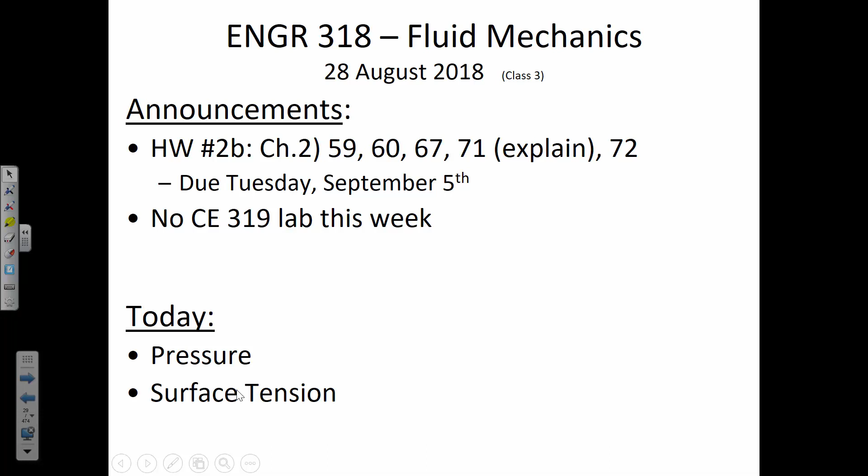All right. For the record, we're not eating shots in the class. It's candy. We're eating candy.

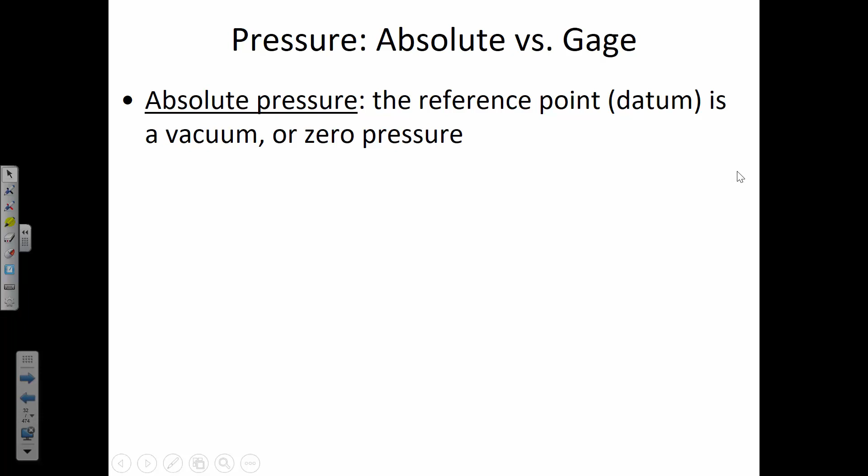So absolute pressure is using a vacuum as 0, whereas like my tires in Huntington, if I was going to measure the pressure, it would be atmospheric plus the actual pressure inside the tire that's over and above atmospheric. So if I keep my tires at, say, 34 psi, the absolute pressure is the relative pressure plus the atmospheric. In terms of kPa, the typical atmospheric pressure in Huntington is probably about 101 kilopascals, and the pressure in my tires above that is 234 kilopascals. So the total absolute pressure in my tires would be 335.

Now gauge pressure uses some other reference point as where we begin our measurements, and atmospheric is our measuring point. So in Huntington, the gauge pressure of the atmosphere is 0. That's measuring how much the atmospheric pressure is relative to itself: 101 kilopascals minus 101 kilopascals. So the gauge pressure of the atmosphere in Huntington is 0. And therefore my tires would just be whatever the differential is that little stick gauge says. This little stick gauge already has built in the assumption that you're starting with atmospheric pressure as your 0 point.

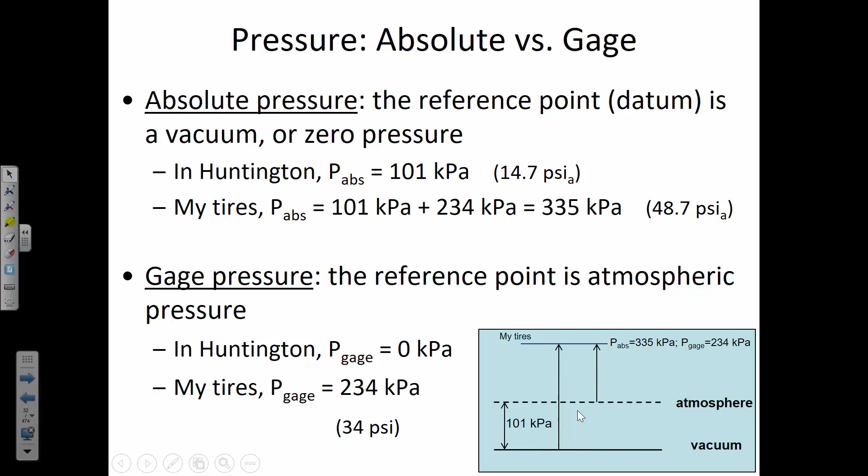Do you remember from our last class on Thursday, when do we usually use absolute temperature? We talked about the difference between relative and absolute in terms of temperature in class on Thursday. It's gases, right - whenever you're working with gases, you'd use absolute temperature. And in the same way, oftentimes when you're doing gas law type problems, you'll also have to use absolute pressures in a lot of cases.

So here is a gas law example. I apologize that we had to rush through gas law example number 1 in class on Thursday. Let's take a little more time for this one though. It uses that same formula, that density is the pressure of the gas divided by R for the gas and the temperature. So here we have a 2.5 cubic meter tank of oxygen.

We're going to pressurize it to 7,650 kilopascals, and that's an absolute pressure. The tank, the steel of the tank, is 50 kilograms, and the temperature of the whole system is 120 degrees Celsius. So what's the total weight, taking into account not only the tank but also the gas?

I think to be more precise, I'm asking what is the mass, not just what is the weight. Let me update that slide to say that.

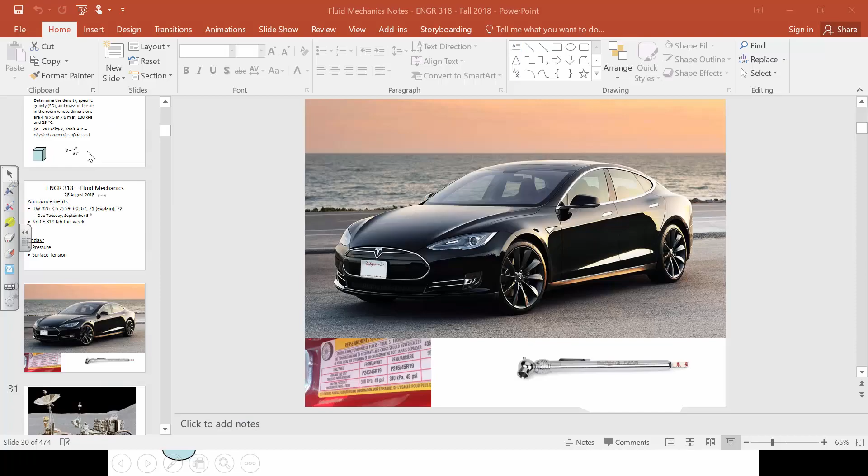What is the total mass? All right, let me pause the recording for a minute, give you some time to calculate based on the volume. You're going to need to know the density of the gas, and then once you have the density and you know the volume, calculate the mass of the gas.

All right, so the pressure is force per area, so newtons per meter squared. My point about units is that if you write 7,650,000 newtons per meter squared, including the units is going to help you see when you do and when you don't need to expand something out to be dimensionally consistent.

So the R value is 259.8 joules per kilogram Kelvin. Now the joules we could expand out ultimately into kilograms, meters, and seconds, but we won't go through that derivation. We just, in this case, know that it's going to cancel out to where the density is going to give us kilograms per cubic meter eventually.

And then the temperature will be 393.16 Kelvin. So when we do that, the density of the gas should be 74.90 kilograms per cubic meter. Did anybody else get that same 74.90 kilograms? Oh, no.

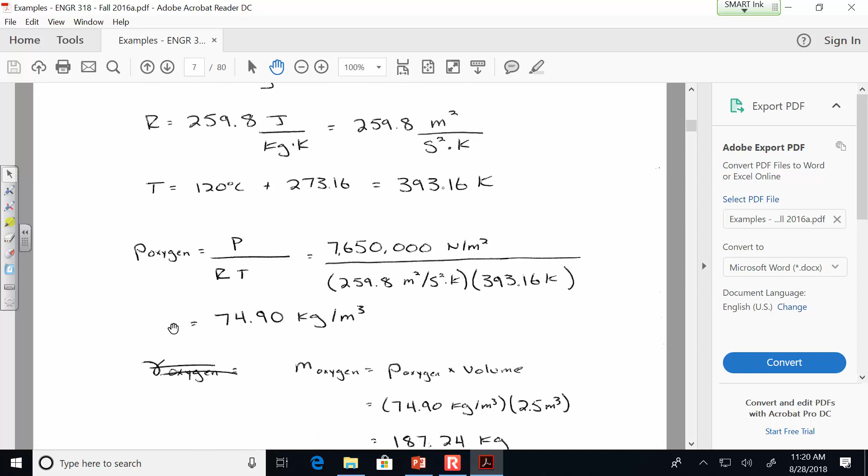That's better. I expanded out the units here just for the curious. A joule per kilogram Kelvin is the same thing as a meter squared per second squared Kelvin. And we see if we put that full expression into the density, when you cancel out the units that are in both the numerator and denominator, cancel out the Kelvin, and of course a Newton is a kilogram meter per second squared, we do get units of density for the density of oxygen, and then the mass of oxygen that's there is going to be the density times the volume.

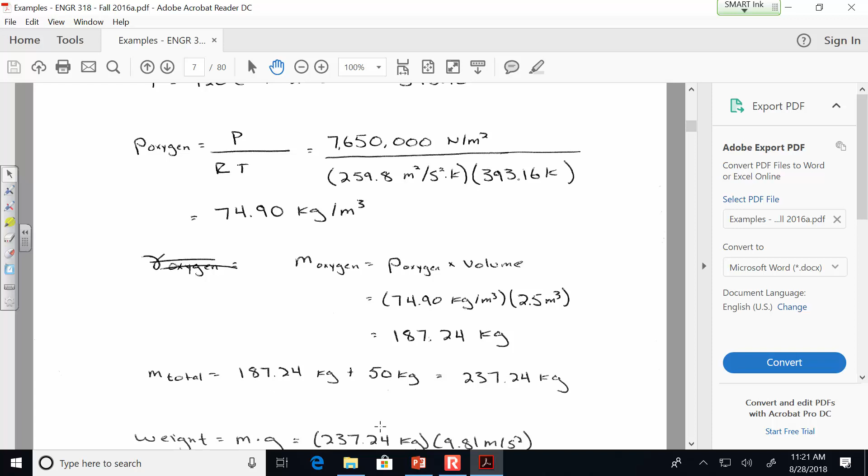So there will be 187.24 kilograms of oxygen inside of that canister, which has a mass of 50 kilograms. That's the mass of the steel of the cylinder. So the overall mass is 237. Oh, it looks like maybe I did want the weight after all.

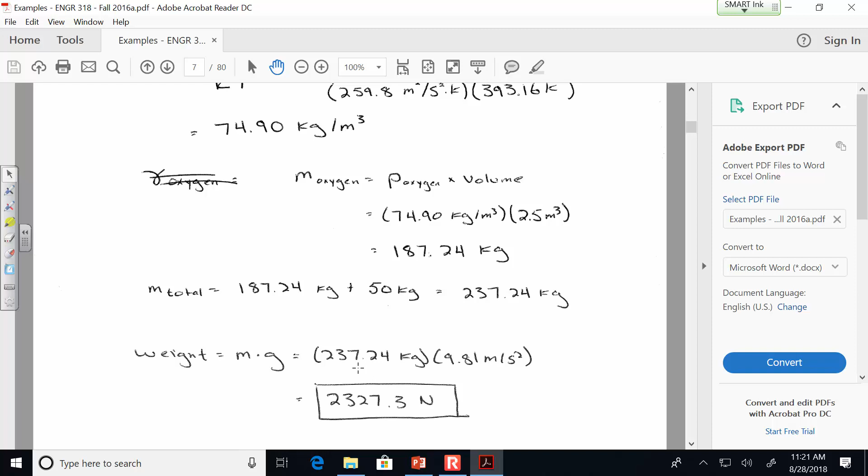I was intending the weight, so I meant what I said. When we have the mass, we find the weight by then just multiplying it by G, and it'll tell you the number of newtons. So let me change that back again. The materials have a mass of 50 kilograms, and what is the total weight? I'll put it in bold so I don't forget that that's what I really mean.

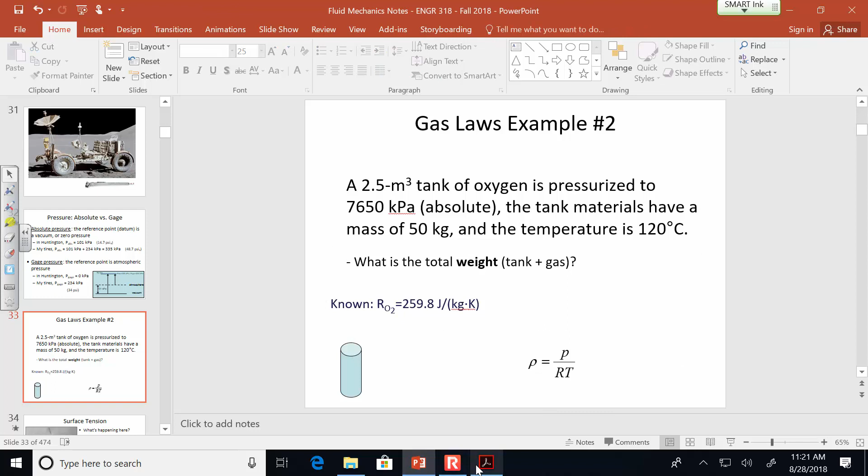All right, so I can leave this solution up another minute if you want to take a look, or if there's anything you want to ask about here in this one.

So it's a gas law problem where we're using the gas law constant R for a specific gas, not just the universal one. We know the molecular weight of this gas, so we have the R value specific to oxygen. We know the temperature in absolute terms, we've got the pressure in absolute terms. So from all that, we were able to calculate the mass and therefore the weight.

Any questions on this example?

Pressure is a unit of force over some area, and it's not just a fluid property, it's a solid property as well. Right now, maybe you're feeling pressure on the bottom of your feet because you have a certain force related to the weight of your leg acting downward through the foot area that you have. The reason why they wear snowshoes in the winter to walk on top of snow is that the snow can only bear a certain force per unit area, and so by spreading out the human body's weight over a larger area, it doesn't exceed the capacity of the snow. So units of force per area, pressure.

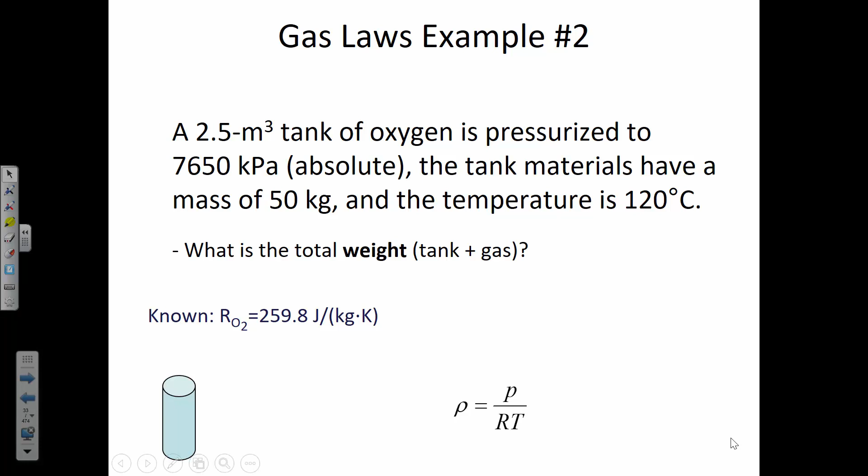We'll do a lot more with pressure, but let's turn our attention to a property known as surface tension.

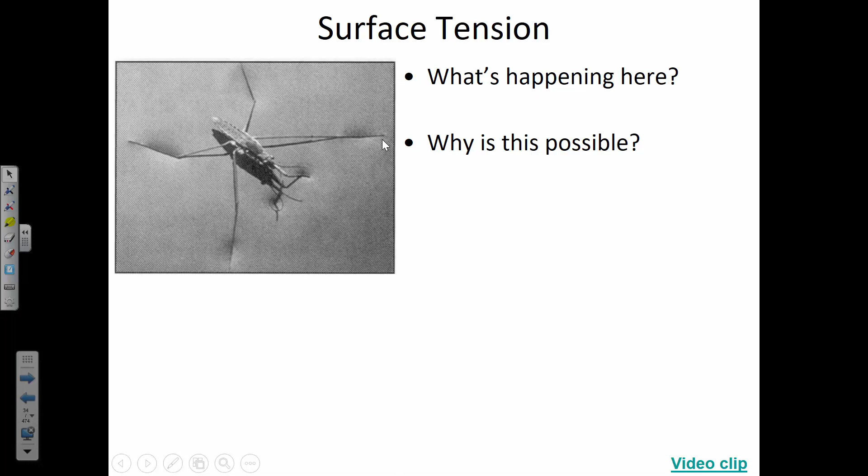Okay, this picture here, what's happening and why is it possible? So what's going on here? Who wants to take a crack at diagnosing the image we're looking at? All right, so it's a bug on water. How do you know it's water and not plastic? Yeah, you can kind of see a little deflection in whatever this is. It's water. There are bugs that have specifically adapted to environments like this so that they can walk on the surface of the water, and so there's some property there that enables a bug to walk on water.

So what are the specific reasons why this is possible? Well, first of all, if this bug was really heavy, it wouldn't work. So it's partly possible because the bug doesn't weigh a lot. And we also notice it has some certain length, its leg length is part of the key here. If its legs were shorter, it wouldn't be able to do it either.

If we think from a force balance perspective, the downward forces of the weight of the bug are resisted by something, and what that resistance is, is the surface tension. The surface tension is that the molecules in this water are attracted to each other so much that their bond with each other at the surface is greater than the downward force of the bug.

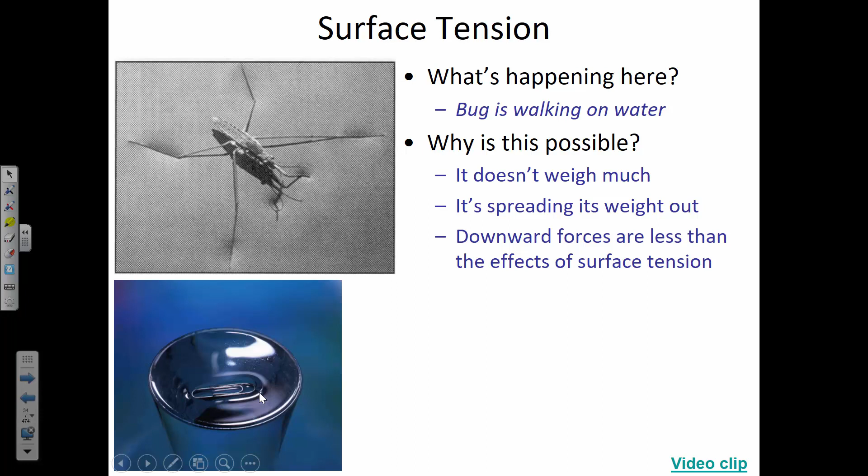And there are similar variations of this experiment where you can have even a paper clip float on water. What's notable about a paper clip is that we know it's made out of steel, and steel has a higher density than water, so it shouldn't float. Not from the standpoint of density, but it will float on top of the water because the attraction that water has for itself, those polar bonds, are very strong, especially at the surface. So in just a minute I'll show you why those bonds are even more attracted at the surface, but let's, just because it's fun, watch this video clip of a bug walking on water.

Surface tension and why it allows things that are heavier than water to float on top.

The forces at the top of a water-air interface are greater than underneath, because consider that the water is attracted to all of the molecules surrounding it. It has a certain amount of molecular attraction, but this one that's in the middle has attractions with the one to either side, the one beneath, and also the one on top. So think it's just got a certain number of bonds, and it's spreading out those bonds across 4 different molecules. Now we're just thinking in a single dimension; in reality, since it's 3-dimensional, there's one in front of it and one behind it, but for our purposes of illustration, it's fine to think in 2 dimensions here. Now the molecule at the top is attracted to the ones on the sides and also the one beneath, but since there's no molecule above it, that same bonding force is expressed over fewer molecules. So the attraction at the top is higher than for the water molecules beneath, because there's no water molecules above it. So at the surface, there's a greater attraction, which we call a tension, than for the water molecules beneath.

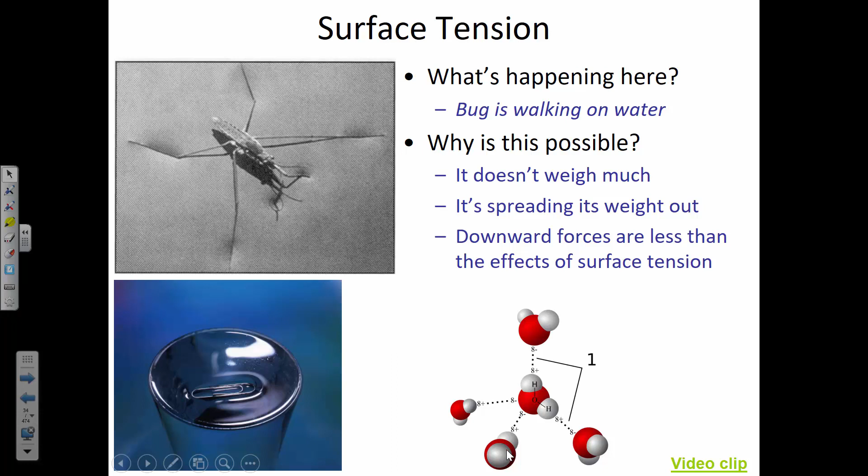Is this the same or different as a buoyancy force from displaced water? Great question. This is different. Sometimes there will be both a buoyant force and a surface tension force, but this is different. That's a really good question, I'm glad you asked that. We'll get into buoyancy a little bit later.

There's something called the capillary effect, and we're going to observe it in the lab, where if you have a small diameter tube, if it's made out of glass in particular, and you dip the tube down into water, the water gets drawn up into the capillary tube. The smaller the diameter of that tube is, the higher the water goes. If you have a really, really fine tube with an extremely small diameter, then the capillary draw can be quite high. The reason for that is that the liquid molecules are attracted to the glass wall.

Glass is mainly made of silicon dioxide, which is polar, just like water is polar. So what the water is trying to do as it's drawn up inside the capillary tube is maximize the contact area with the inside of that glass tube.

But we can do a force balance on a capillary tube like this by considering the tube diameter. In the case of water, there's a contact angle that is essentially very close to zero. In other liquids like alcohols, oils, or mercury, there may be a more distinct contact angle where this meniscus, where the water kind of climbs up the edge even a little bit more, would be more pronounced. So the surface tension force in this case can be calculated by the surface tension constant, and then pi d is the relevant length parameter for a circular glass tube.

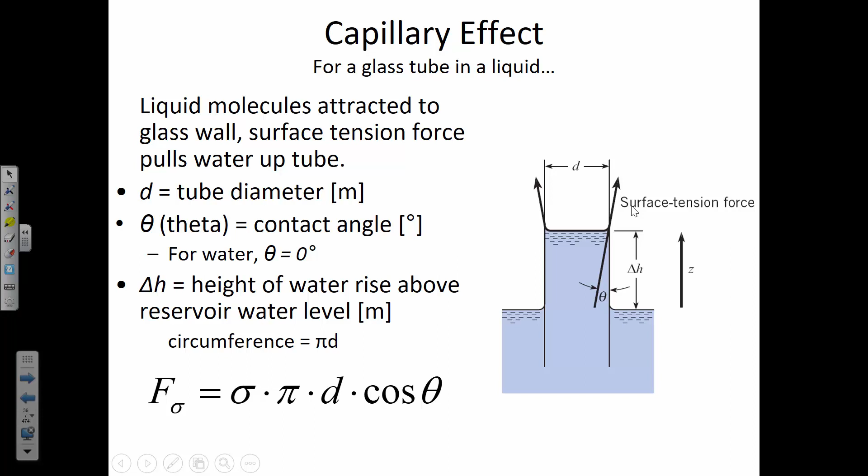The cosine theta is thrown in there just in case we're working with a liquid that isn't water, because the surface tension forces are straight up due to the zero contact angle for water. But in some other liquids, the forces may only be partially up, with some force in a different direction. So we'd have to account for the angle if it's a liquid other than water.

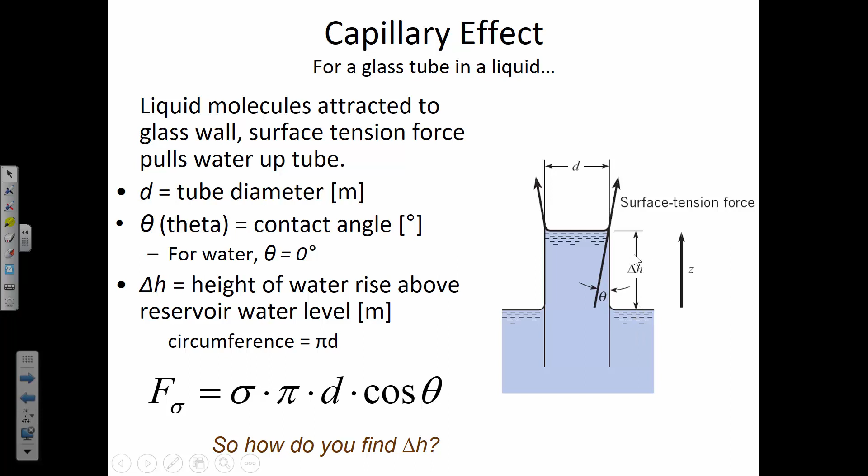So what about this? What if we wanted to know how high the water is going to be drawn upward? What is delta H? How can we find delta H? Well, to do that, we do a force balance.

Let's work an example so we can see the specifics of it. If we have water at room temperature and a surface tension constant of 0.073 newtons per meter, how high is the water going to rise if we know the inside diameter is 1.6 millimeters and a water temperature of 20 degrees Celsius? The key here is to do a force balance.

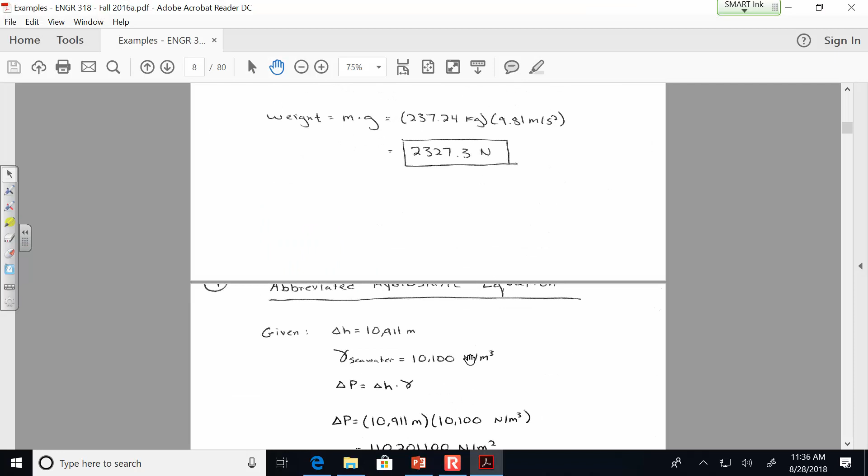First of all, it told us the temperature of the water. And if the water temperature is specified, that means you need to get the specific fluid properties for that temperature out of the back of the book.

At 20 degrees Celsius, the unit weight of water is 9790 newtons per meter cubed. That's a little bit lower than the typical 9810 newtons per meter cubed that we'd use as the default assumption for the specific weight of water if the temperature wasn't provided. But since it is, we'll look that up. Also, the surface tension constant for water at 20 degrees is 0.073 newtons per meter.

Now what we're doing is a force balance where we've got the water and a tube went down into the water, and what happened is the water is going to rise to a certain level. So the force balance is the weight of the water acting downward balanced out by these surface tension forces.

Now, the surface tension force, there's not two of them, there's just one. It's working all the way around the outside edge, pulling up. So I'll write the force due to surface tension as an upward force. The force due to surface tension up minus the weight of the water down is equal to 0 because it's in equilibrium.

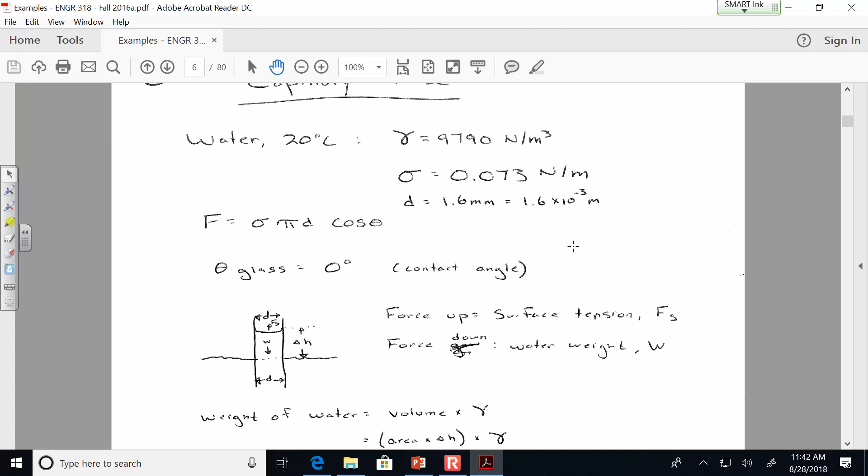Okay, so I've got it set up. What I'd like you to do is plug in the numbers and try to solve for delta H. How high is that going to go? Delta H is how many millimeters the water is going to be drawn up inside of this glass tube because of the surface tension wanting to maximize that contact with the glass.

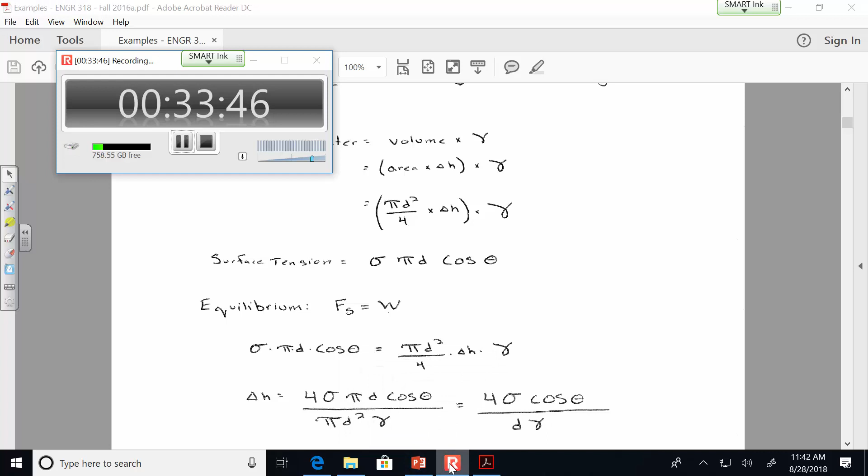They really do need to expand the line of stuff, right? 5-hour energy, peanut butter sandwiches.

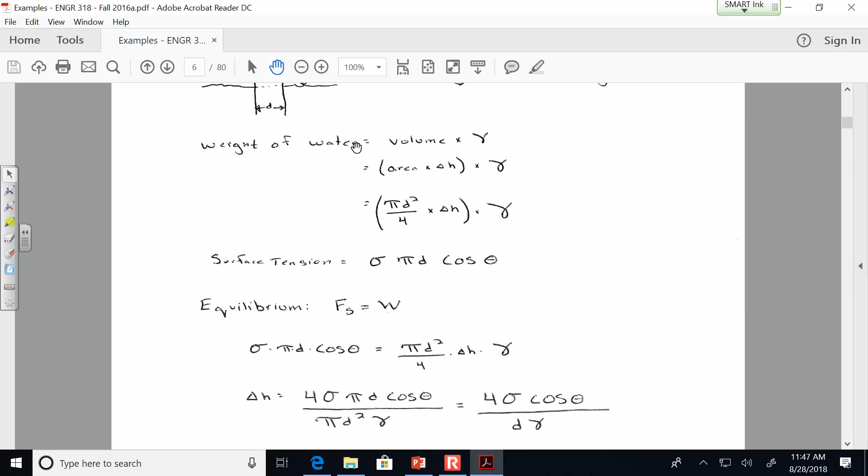All right, who got 18.6 millimeters? Good, 18.6 millimeters. Let me put it up on the screen, and then we'll talk about what that means.

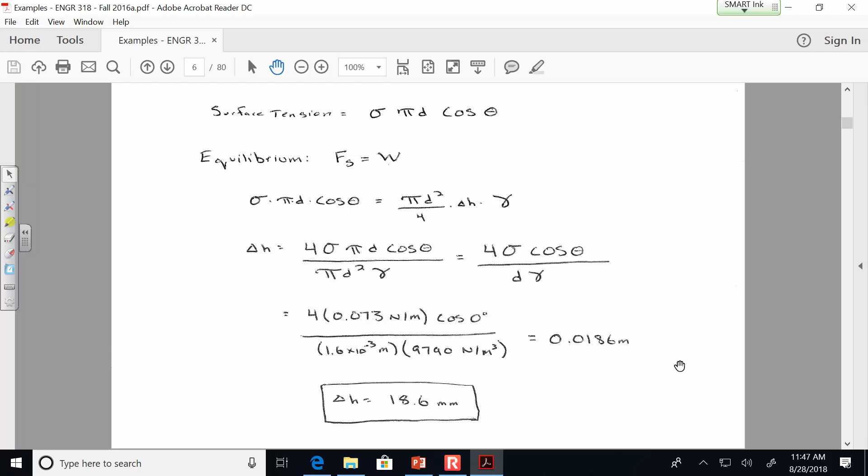Come on, almost there. All right, so you rearrange the equation to solve for delta H, and we get 0.0186 meters, which if you multiply that by 1,000 is 18.6 millimeters.

By the way, on a quiz or an exam, if I say express the answers in millimeters, there would be some small deduction, no matter how minor, if you only left it in some other units.

But what happens if we make the diameter of the tube smaller? What's going to happen to delta H? It's going to go up.

So this one was 1.6 millimeters. What would happen if we took that diameter in half? What would happen to delta H if instead of 1.6 millimeters, we made the diameter of the glass tube 0.8 millimeters? What would halving the diameter do to delta H?

Good, why double? You're exactly right, because it's diameter squared. So if you make the diameter half as large, then the cross-sectional area is 1/4. You're reducing the cross-sectional area. You're also reducing the force, but you're reducing the cross-sectional area more.

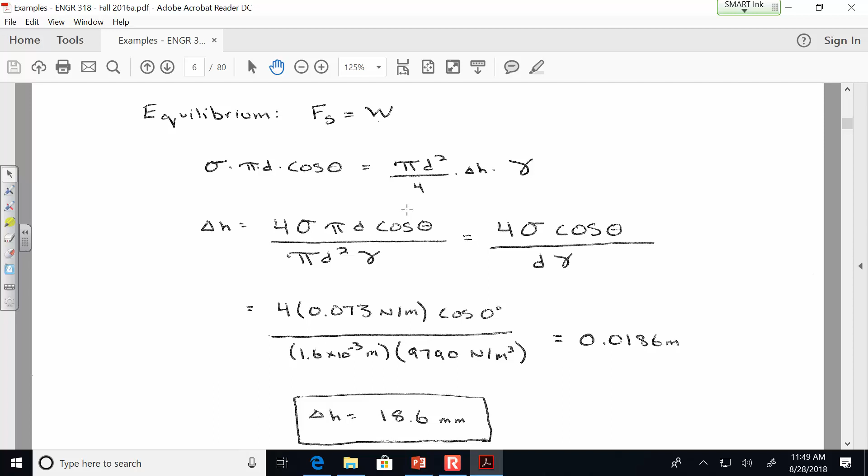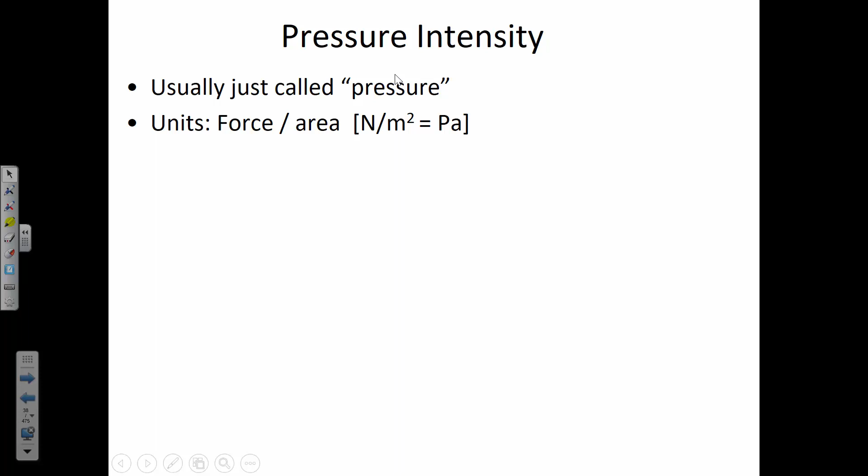Okay, so let's take a look at one other slide. This is a slide I'm going to show you again in another class lecture, but just to cap off what we've been talking about today, both pressure and surface tension: the full description of pressure is pressure intensity, and the reason for that is pressure is a scalar, meaning it doesn't have direction, only magnitude, and it's acting equally in all directions.

We'll talk about why that is, but when I was younger it always seemed strange to me that people would do scuba diving tests in really narrow ponds that go very deep. It seemed like the pressures would be different, but they're not. Pressure doesn't depend on the width of the fluid, it depends on the depth of the fluid.

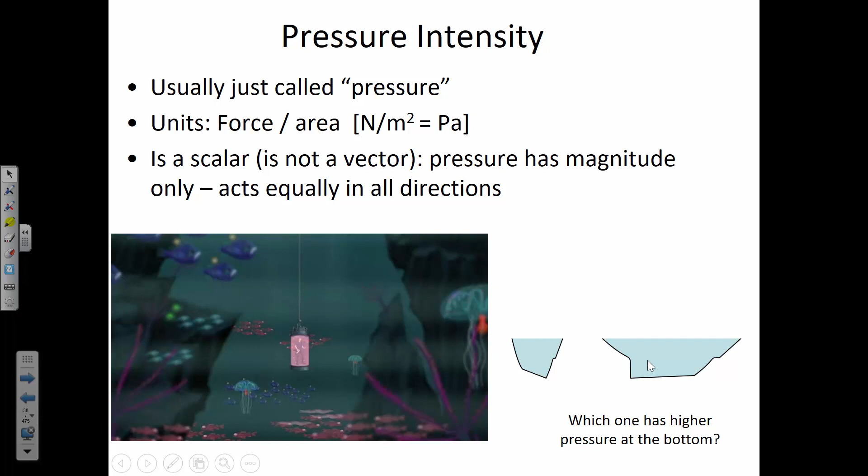We'll get into the hydrostatic equation later, but the idea of pressure is that it acts equally in all directions. So if you're at the bottom of a swimming pool and your ears hurt, you can't turn your head to avoid that pressure. It's not like sticking your head into the wind or turning away from a loud sound. The pressure is acting in all directions equally.